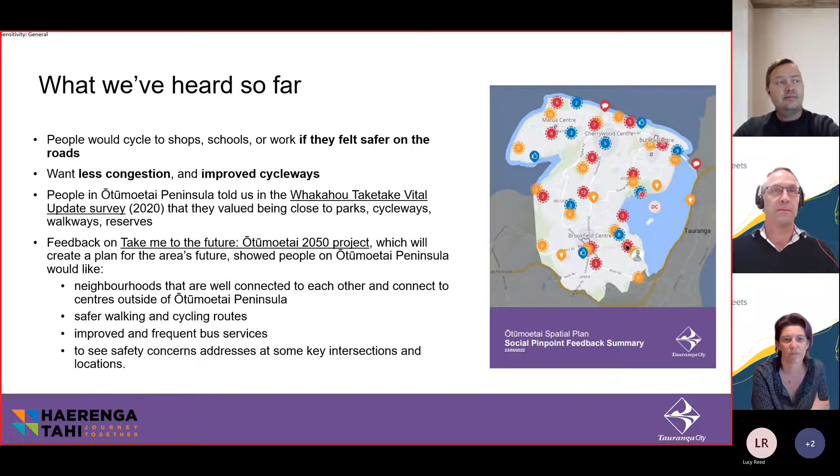So what are we doing right now? We have an opportunity to seek funding from the government to develop the Accessible Streets program. With this project, we are working alongside our partners to develop a business case to evaluate the benefits, costs, and risks of various cycleway options before we reach a preferred option.

Among the things we need to consider when reviewing these options are the individual community needs, how it'll affect local commercial and retail centres, the environment, the cultural areas, and how the primary route will connect to schools and the city centre. Once all this is done and the business case is approved, we can proceed to the next stages of the project: detailed design, and eventually construction.

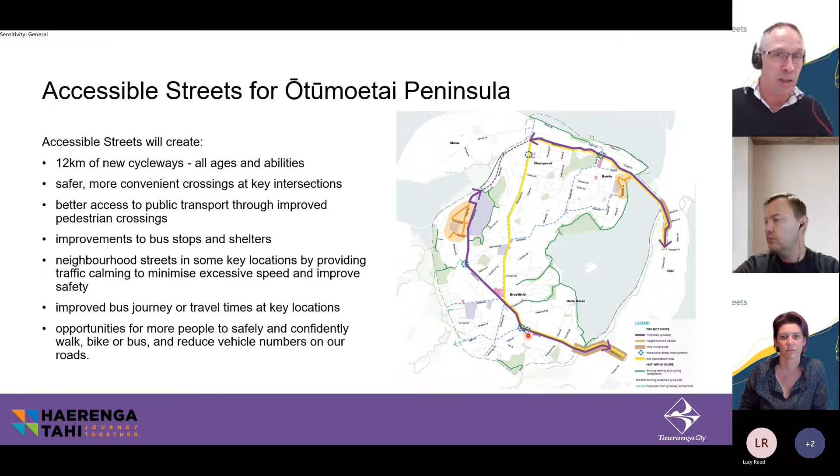From a cycle perspective, the key group of people we're aiming at is the all ages and ability group - the 8 to 80. Within that group, there's a group called interested but concerned. They're the people who say they would start riding their bike if they felt safer. And to provide the infrastructure to make people feel safer, it sits up at this end here.

It's looking at an off-road path or a cycleway separated from the traffic by a raised median, or a really slow street, 30k an hour with some sharrows on it. What doesn't work so well for encouraging people who don't feel safe to ride is on-road painted cycle lanes or sharing the traffic lane with buses or heavy vehicles. So from a cycle perspective, we're aiming at this higher end of comfort, making people feel comfortable so they start riding.

What these facilities look like - there are three main facility types. The first is a shared path, used by people both cycling and walking and scootering. They work really well over a variety of areas. Typically we try to use them over shorter distances because you do end up with conflicts between pedestrians and riders, particularly where your pedestrians are more elderly or younger.

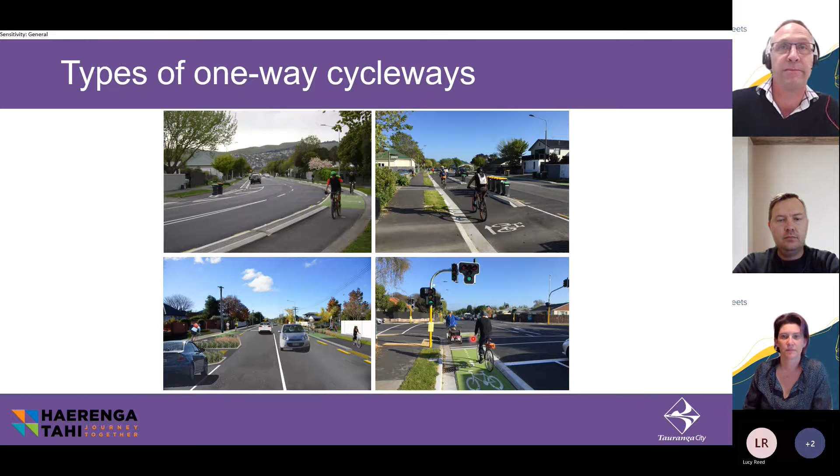When we start looking at different cycleway facilities, there's a number of considerations - here's just a short list. We consider things such as how visually impaired users would use the footpaths or shared paths, what impact there is to on-street parking, who the businesses are on the route, and how they use their parking and access their buildings.

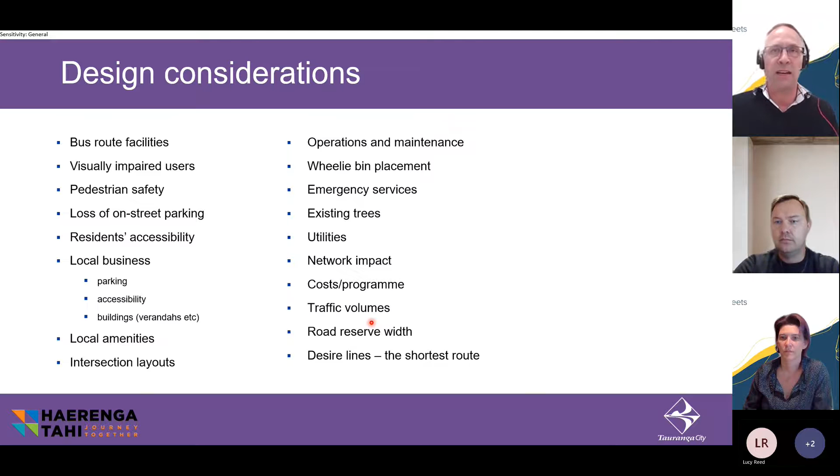What kind of vegetation do we have along the route, and is it protected? Is it offering an area of shelter? And what are the road reserve widths - boundary to boundary and curb to curb - which leads on to what the potential cost of construction could be.

Being quite a large study area, we've split this up into two main areas. Area one is shown here, from up by Ōtūmoetai College, along Windsor Road, Bellevue, Waihi, up 11th Ave to Cameron Road. That's still quite a large area, so we've split it into three sections. I'll step you through each of those three sections now and the different facility types we're considering at the moment.

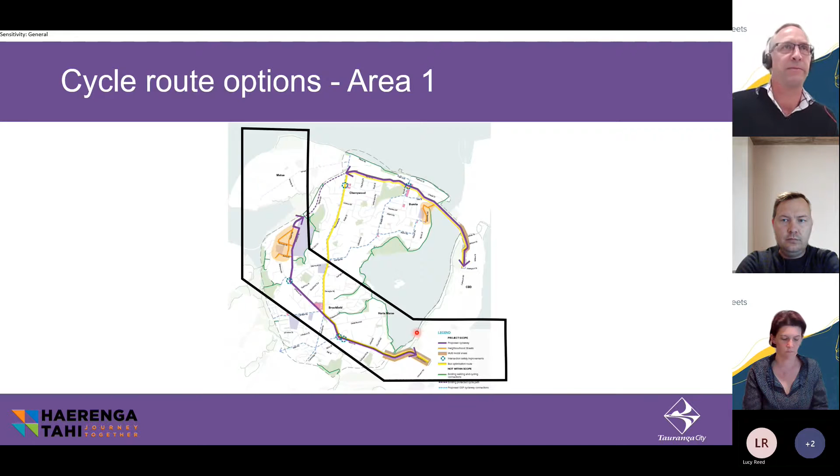For section 3, which starts at Ngātai Road, where there's a two-way cycleway existing on the north side of the road, we come down Ngātai Road, Charles Street, Windsor Road, past Ōtūmoetai College, and continue down to the intersection with Bellevue. Through this section, we've identified 4 different cycleway options.

The first 2 of them are two-way cycleways, starting at Ngātai Road, it's a two-way on the eastern side of the road that continues along Windsor, past the school and to Bellevue.

This option has one-way traffic on it, and what that allows is parking on both sides of the road. For option B, it's the same design, but it has two-way traffic flow, and to achieve that two-way traffic flow, it removes parking from one side of the road.

Option C provides one-way cycleways, so that's a cycleway looking like this on either side of the road. It removes parking from one side of the road and retains two-way vehicle flow.

Option D has the two-way cycleway on the western side of the road, something similar to this here, and it also has parking on one side.

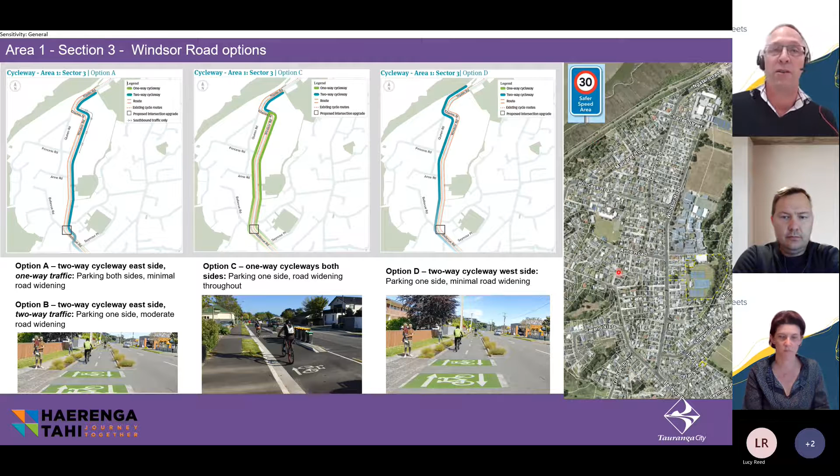Now linking onto this section is Bellevue Road. We've just talked about Windsor Road up here. We continue along Bellevue Road, through the Brookfield roundabout, up the cutting, up to where the BP service station is on Waihi Road. Through this section, we've identified 3 options.

Option A being one-way cycleways on either side of the road, and shared paths through the Brookfield intersection. This option removes parking from both sides of the road.

Option B provides the two-way on the west side of Bellevue Road. It allows for parking on the northern side of Bellevue, and then going through the Brookfield roundabout, it uses the Lees Park area rather than staying up right on the roundabout.

Option C is the same along the first section of Bellevue Road, and it's a two-way through the Brookfield roundabout, and then it splits south of the roundabout to one-ways on either side.

This section of Bellevue Road coming up to Waihi Road is reasonably steep, so providing one-way cycleways does have a safer outcome for people riding. You'll note that we're not proposing a two-way on the eastern side of the road. That's because people riding against the traffic flow would be going down the hill in an unexpected direction.

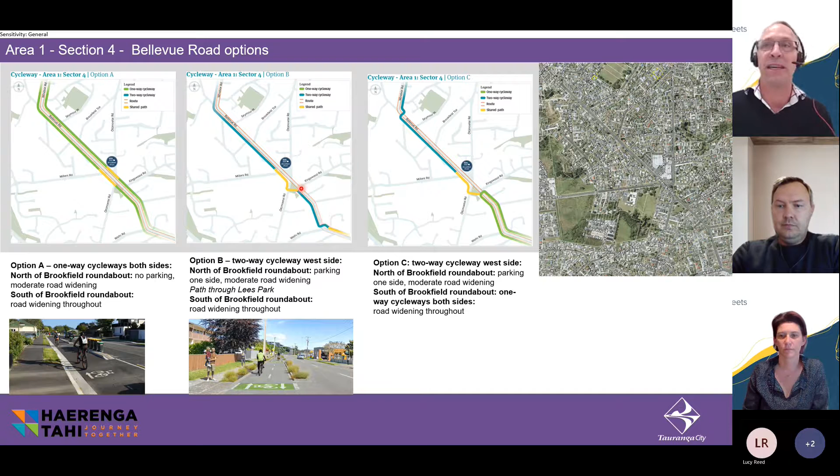Then section 5 links on to Bellevue Road. It starts at the BP service station, continues along Waihi Road, through the Birch intersection at the bottom of the hill, and then up 11th Ave onto Cameron Road. Through this section there's been 4 options that are identified.

One-ways on either side of the road, which retains the central flush median. A sub-option of that provides the one-ways and then has a raised median through the middle of the road, with a roundabout at Churchill Road and a roundabout at the top of Bellevue Road.

That's to remove the conflict between drivers turning through queued traffic, which occurs in the morning peak period, and riders.

Option C is a two-way cycleway that is on the western side of the road. It passes through the BP intersection on the northern side, then crosses to a two-way on the south side.

The reason we've crossed over to the south side here is to avoid this area that has a reasonably intense land development with a more elderly population, looking at the potential risk for conflicts between pedestrians and riders.

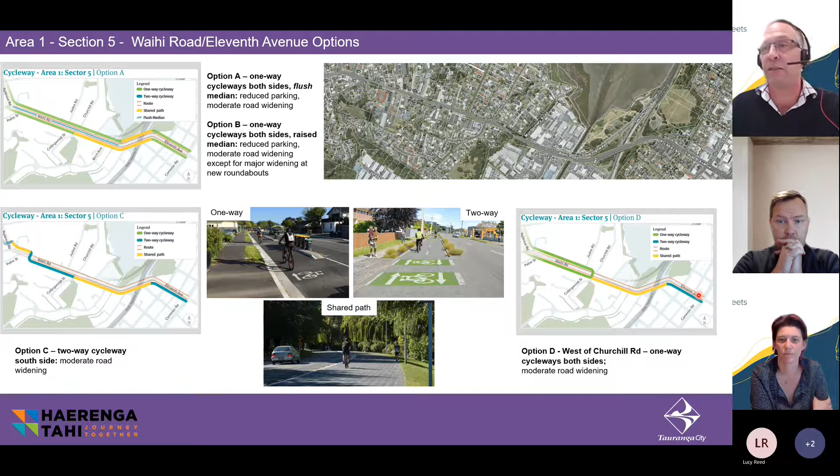So Area 2 starts by the Domain on Chapel Street, Cameron Road, and then continues along Chapel onto Ngātai Road and ends up at the Ōtūmoetai roundabout. West of the Ōtūmoetai roundabout is the existing two-way cycleway on the north side of Ngātai Road.

We've divided this up into two sections for analysis based on the Chapel Street Bridge.

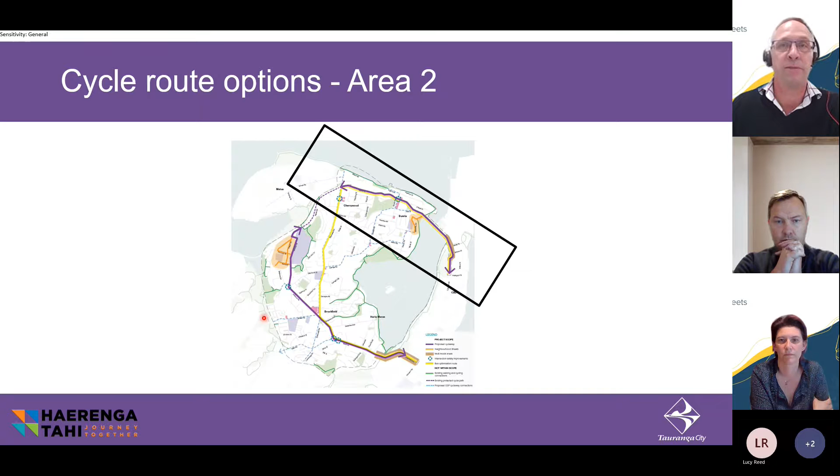Three options have been identified for this section, starting at the Harington intersection. The first one uses a shared path on either side of the road and continues all the way through and across the Chapel Street Bridge to Maxwell's Road. Highlighted on these drawings are potential crossing locations, or locations where we'd look at putting in traffic signals or improving the existing traffic signals.

Option B provides one-way cycleways. So instead of the shared path option of option A, it provides a separate walking and cycling area, which could be quite important around this top area where you have the domain. This retains parking through this section, but changes it from 90-degree parking to parallel parking, so there would be some parking removal.

It retains the signals around Marsh and into the Bayview. Option C provides a two-way on the eastern side of the road for the full length, and then uses short sections of shared path to connect the estuary into the existing estuary path route and provide a crossing point over from Vale Street.

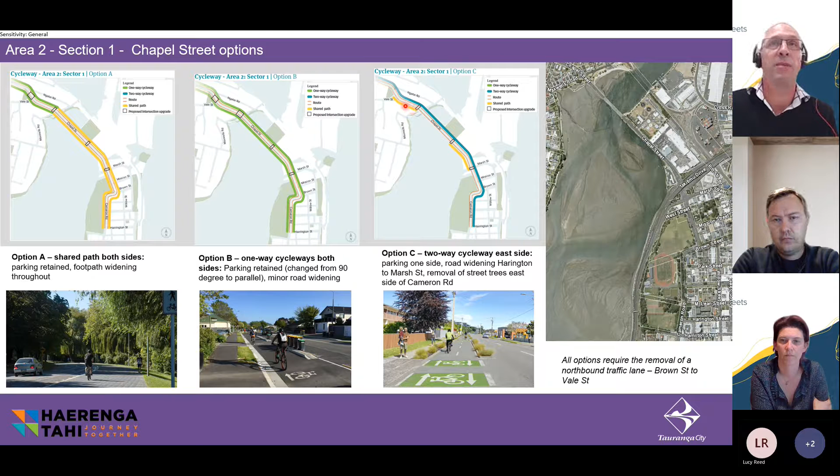Section 2 picks up from west of the Chapel Street Bridge and continues along Ngātai Road up to the Ōtūmoetai intersection. We've identified three potential cycleway options through this section.

The first two, A and B, are one-way cycleways on either side of the road with a short length of shared path from Bureta Road climbing the hill where the road's a little bit narrower.

Option A provides parking on one side of the road, but to achieve that requires the removal or undergrounding of the power lines, so there is a cost implication. Option B removes all of the parking and can be achieved within the existing curb lines.

Option C is a two-way on the northern side of the road. This retains parking on the south side of the road with minimal widening.

Included in these options is the Vale Street intersection, and if we're removing a northbound traffic lane, then the high-speed left slip from Chapel to Vale isn't required anymore, so that would be combined with the current exit from Vale Street. It would still be two-way on Vale, but this section here would be cul-de-saced.

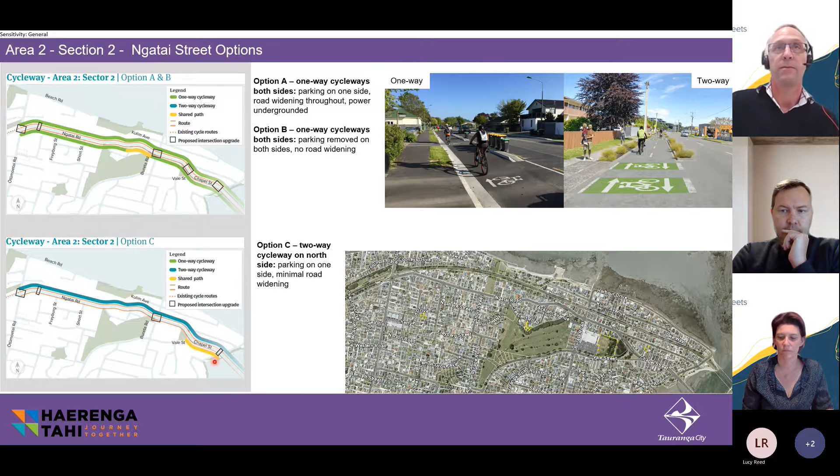If we come back to the Maxwell's Road intersection, there's a couple of options there, be it full traffic signals or whether it be signals for pedestrians and cyclists only. So that's quite a quick skim through the options that have been considered from a cycling perspective.

I'll now talk about the Neighbourhood Greenways, and these are the areas that have been looked at on Maxwell's Road by Pillans Point School, and then the Queen Street area by Ōtūmoetai College.

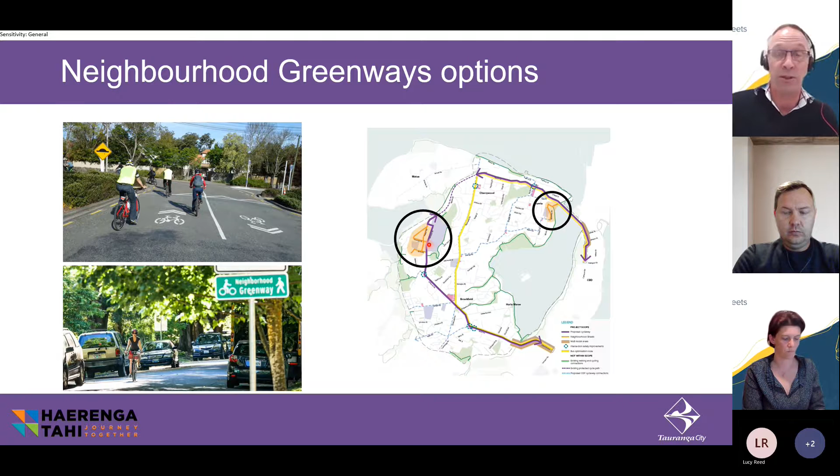The objective of a greenway is to slow down the maximum speeds of traffic to allow people that are cycling or scootering to share that road space with vehicle traffic and have a lower volume of vehicle traffic on it. What that achieves, by slowing it down and having less traffic, is it makes it easier for people to cross the road and do that more safely.

So within the Neighbourhood Greenways, we've identified 4 main options. If I start with option 4, it's providing a 30 km/h speed limit on all of these streets highlighted in green: Queen Street, Princess and Anne.

As I mentioned at the start, Windsor Road would also be 30 km/h as part of the Road to Zero safer speeds around schools. So what option 4 does is simply put up some traffic signs and say please drive more slowly.

As we head from option 4 back to option 1, it's increasing interventions to slow down people driving. The first one would be adding some road marking, known as sharrows, a shared arrow for cyclists and vehicle traffic.

Option 2 builds on option 3 and adds in raised platforms, like these here, probably known as speed humps but a little less aggressive. We also look at intersection treatments where you have large radiuses and quite a wide crossing, and narrow those crossing points up, which helps mobility impaired and visually impaired people cross.

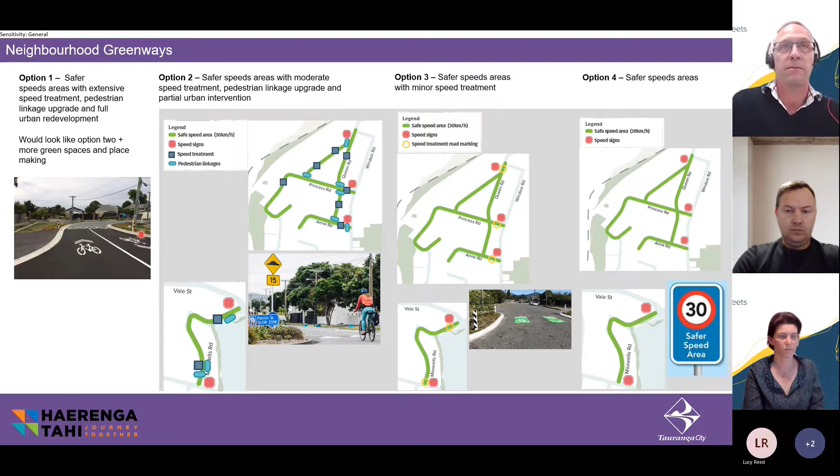Now, if I move on to the bus priority, that's looking at these areas at either end: Chapel Street, heading from Bayview up to Brown Street, and then 11th Ave from Birch up to Cameron Road.

The objective here is to improve the reliability of bus travel time by looking at features such as dedicated bus lanes, or a transit lane encouraging people to have at least 2 people in a car - T2s and T3s, so 2 or 3 people in the car to use that traffic lane.

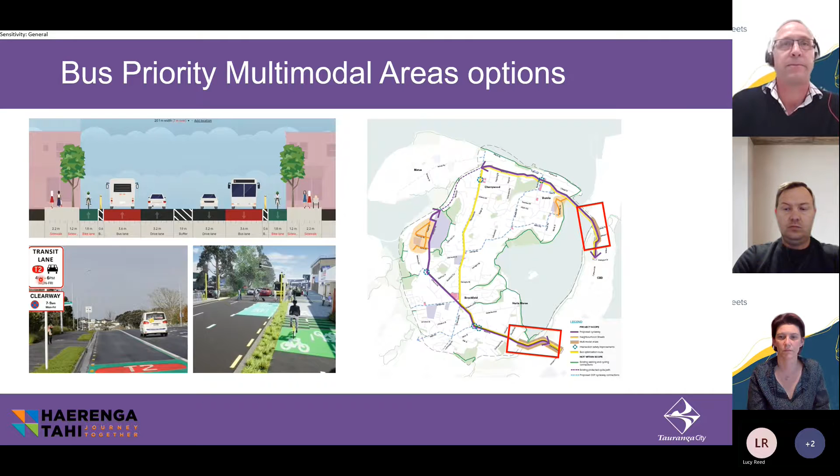So looking at Chapel Street, we've identified 4 options for consideration, the same 4 options we've considered for 11th Ave as well - same philosophy. Option 1 looks at bus stops, which would stop in the traffic lane and require people and vehicles to stop behind them.

What that does is create a gap in front of the bus, so it doesn't get stuck behind a queue. Building on these in-lane bus stops is a bus jump - it takes the traffic signals and allows the bus to go before the general traffic, so it gets in front of the queue.

Building on that further is a dedicated bus lane, starting at the Chapel Street Bridge and continuing up to Brown Street, where there would be traffic signals making it easier for the bus to exit from Brown Street. To achieve a dedicated bus lane, or a T2/T3 lane, requires the removal of a vehicle traffic lane.

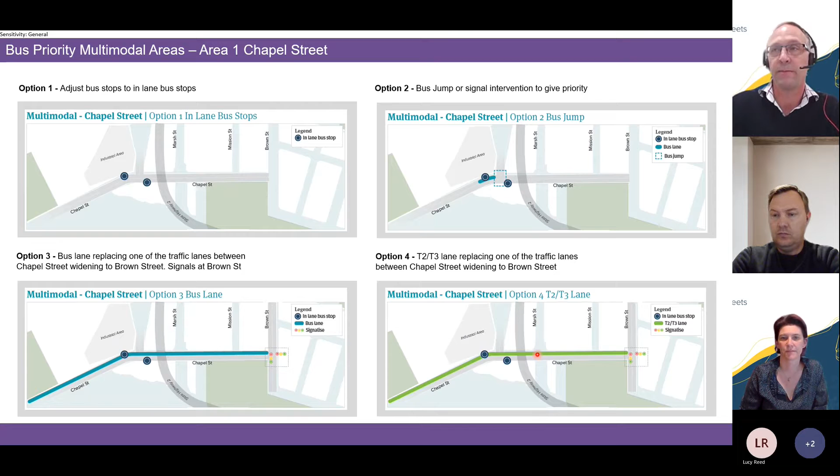So the process we're going through is to identify where the delays are for buses at the moment, and then determine which of these options, or combination of options, improves the travel time.

Now, as part of this project and improving accessibility, we're looking at whether the existing bus stops are in the correct location. We're having a look at where people climb on and off the buses, what the facilities are like, what the shelters are like, whether there's space for people to sit, and crossing the road to the stop.

Do we need to add in a central median to make it easier for people to use? That's been considered along all of Ngātai Road and Bellevue, Waihi Road and Ōtūmoetai Road.

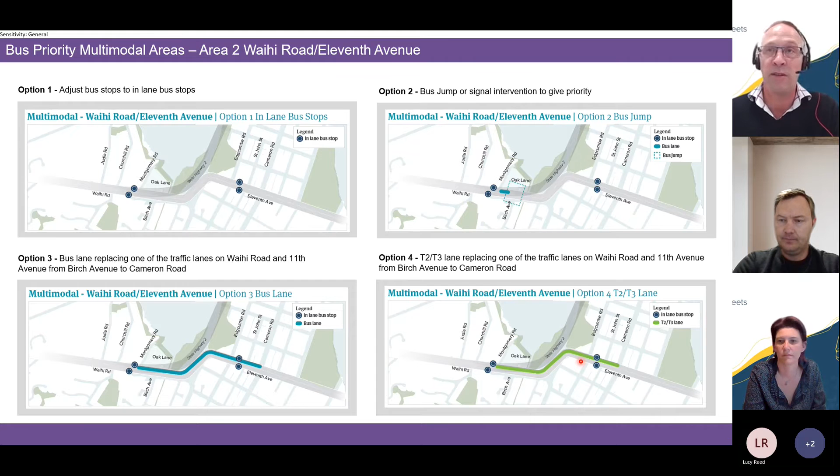And that's something that we're working on at the moment as we develop these options with the Regional Council. So, Dion, if I pass back to you. Yes.